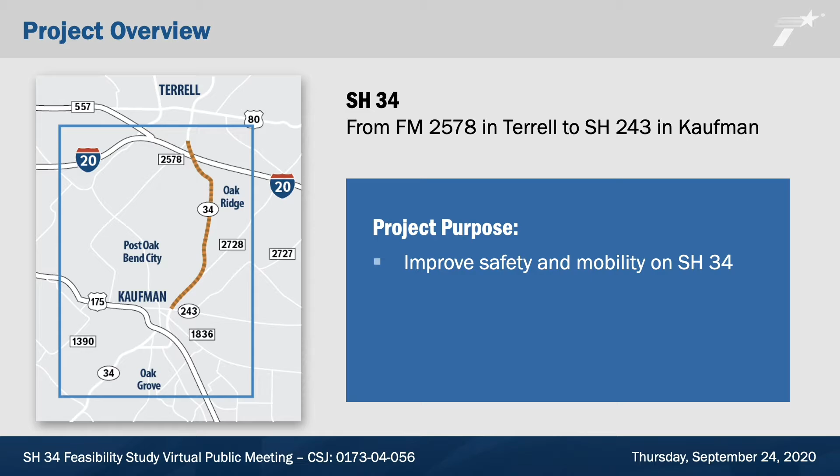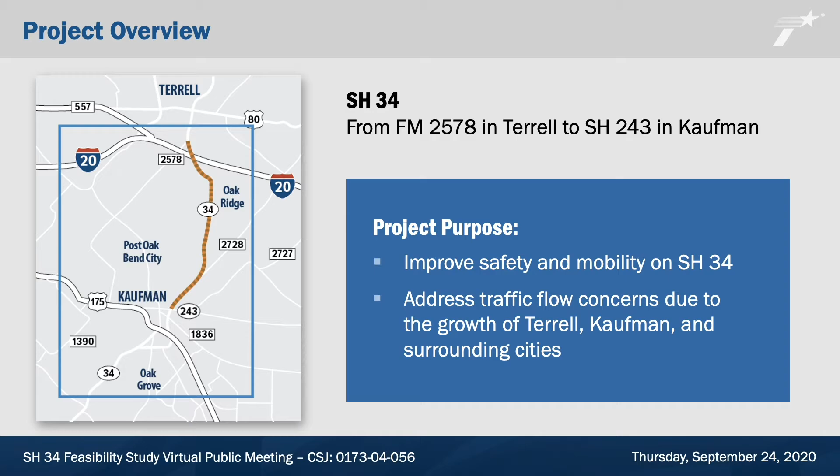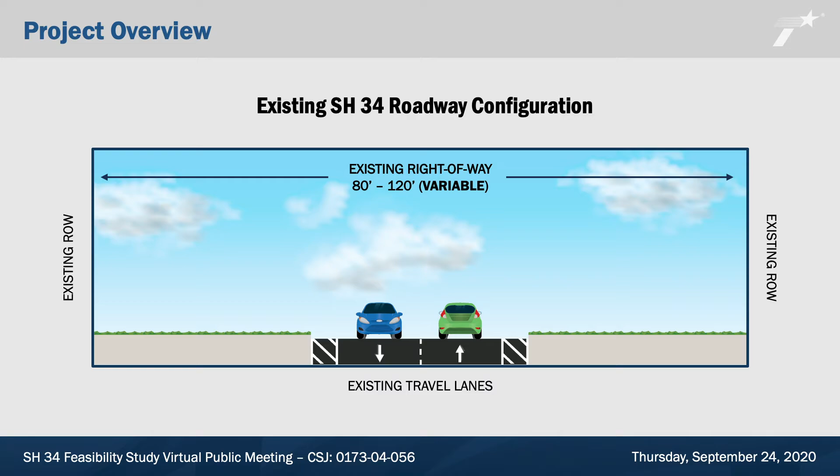This feasibility study also considered safety and mobility, population growth, environmental impacts, costs, and public input when considering potential alignments and improvements. The population in Kaufman County is projected to grow 83% by the year 2040, and SH34 is projected to have about 25,000 vehicles per day, including heavy truck traffic, by 2045. The existing SH34 roadway configuration consists of one travel lane in each direction with shoulders and an existing right-of-way varying along the corridor between 80 and 120 feet.

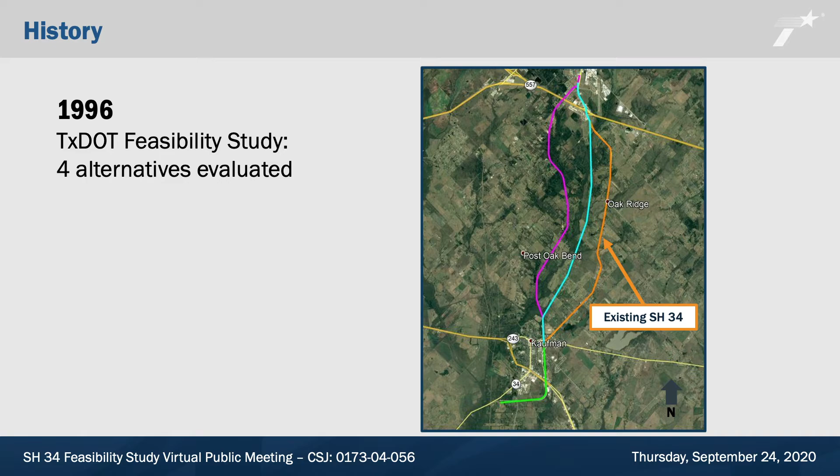There have been previous feasibility studies conducted within this study area. In 1996, a feasibility study was performed by TxDOT and 4 alternatives were evaluated. The recommended alignment was an old railroad corridor and a southern connection around the west side of Kaufman, shown in light blue and green on the map. In 2006, another feasibility study was performed by TxDOT and 11 alignments were identified. The recommended alignment, shown in orange, was ultimately added to the Kaufman County Thoroughfare Plan.

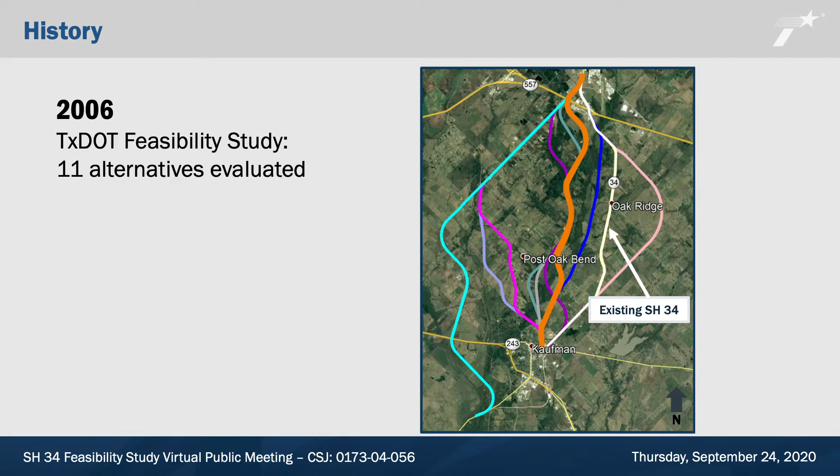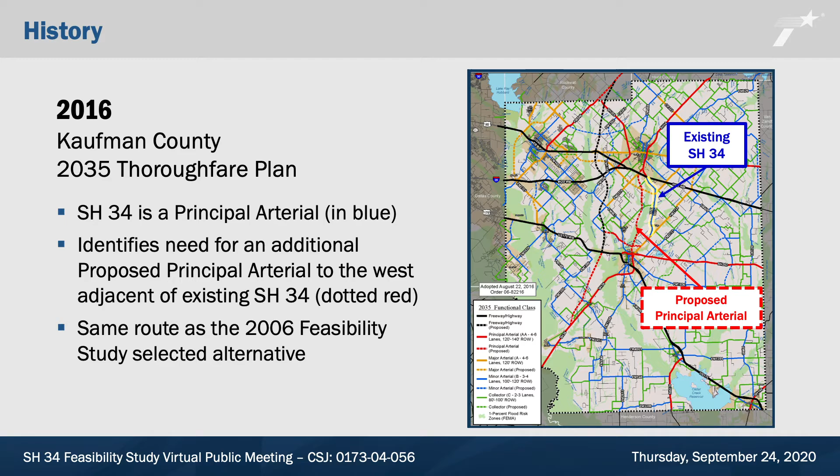The Kaufman County 2035 Thoroughfare Plan identifies existing SH34 as a principal arterial, shown here in blue with yellow highlight. The plan also identifies a proposed principal arterial to the west and adjacent to existing SH34, shown as a dotted red line, which was the 2006 feasibility study's recommended alignment.

This brings us to the current feasibility study, which began in 2018 with 8 alternatives. The assessments began with an evaluation that provided a framework through which alternative alignments could be analyzed. The comparative analysis determined how well the alternative alignments addressed the study purpose and minimized adverse impacts to the human and natural environments of the project area. The 8 alternatives were created with a rural, high-speed roadway configuration to include a design speed of 70 miles per hour, allowing for improved sight distance, and a wide median with a ditch.

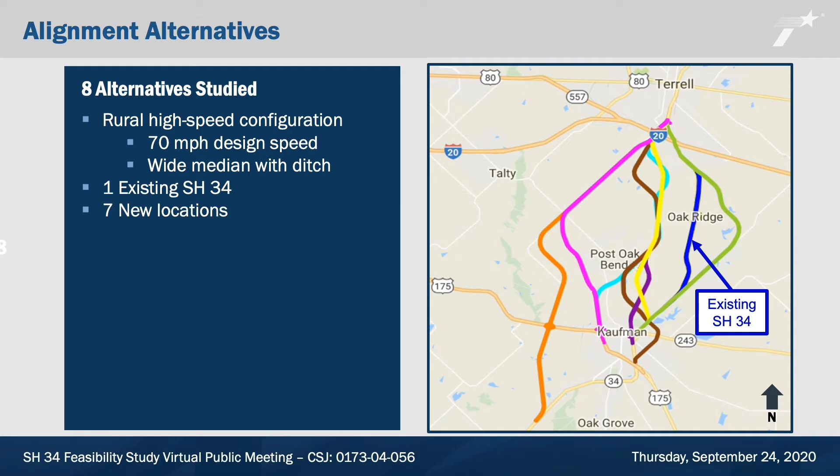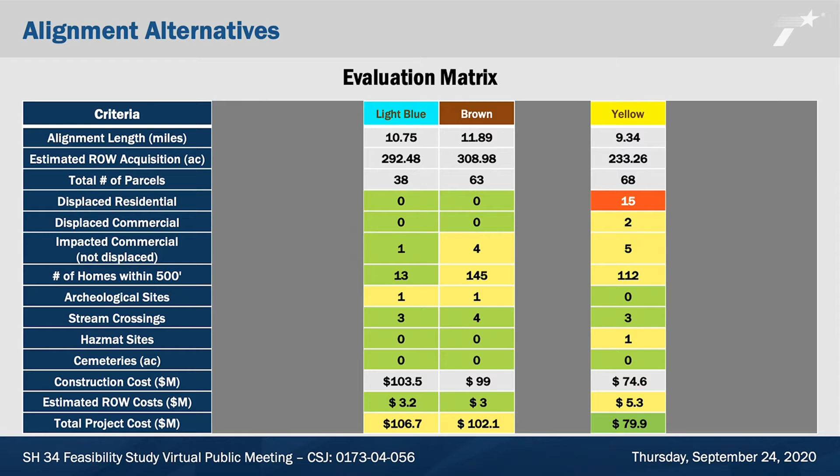Alignments chosen included existing SH-34 and 7 new locations. These routes were presented to local municipalities in spring 2018 and to the public in summer 2018 at a public meeting. Each alignment alternative had various engineering and environmental effects, as shown in the evaluation matrix. The 8 alternative alignments and this matrix were presented. Based on technical analysis and public input, 3 of the alternatives were selected to move forward for further evaluation and study: light blue, brown, and yellow.

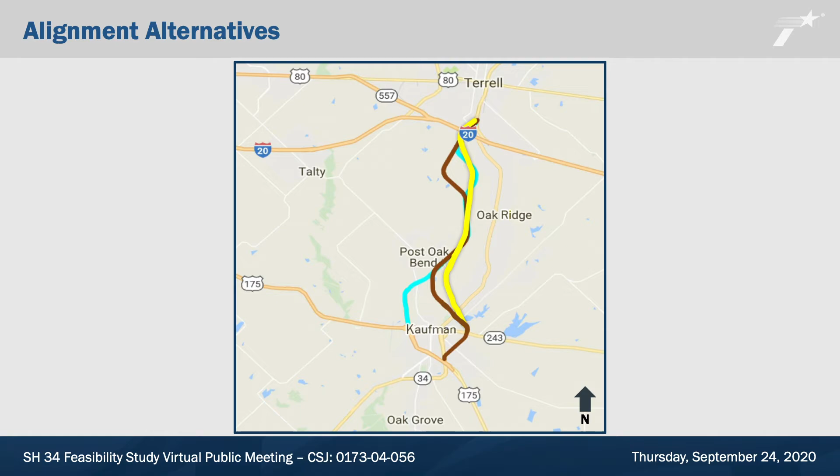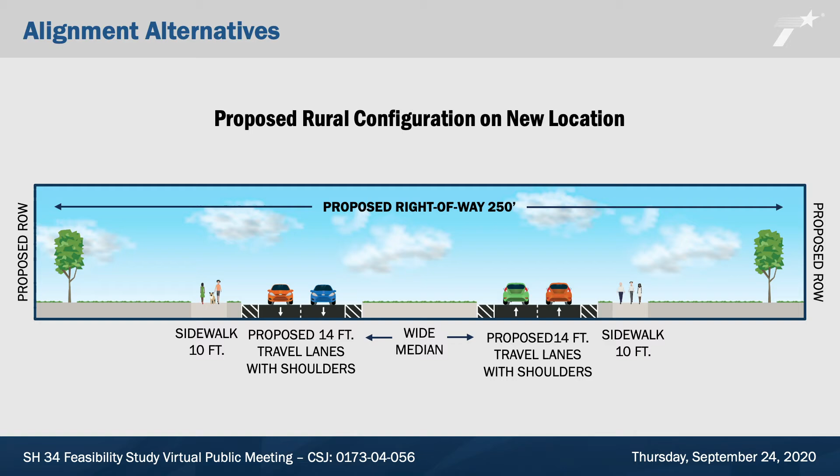All options would be built in new locations that tie into existing SH-34 in Terrell and Kaufman. The 3 selected alternatives had a 4-lane rural highway configuration. It includes 2 lanes in each direction, shoulders, and a 76-foot wide median, and a right-of-way width of 250 feet. The design speed is 70 miles per hour. TxDOT soon recognized that improving existing SH-34 needed to remain on the table. This led to a reevaluation of the proposed design plans for existing SH-34.

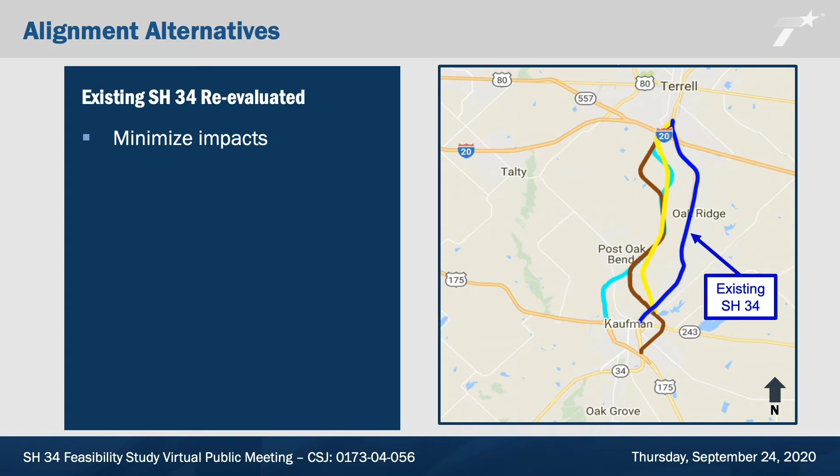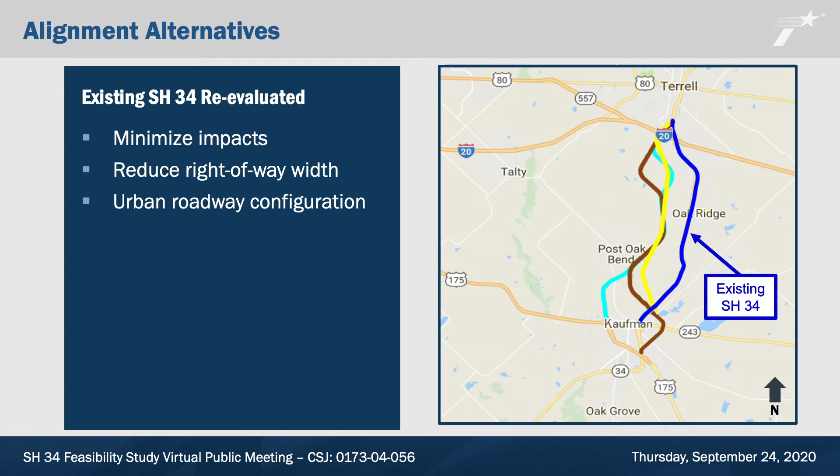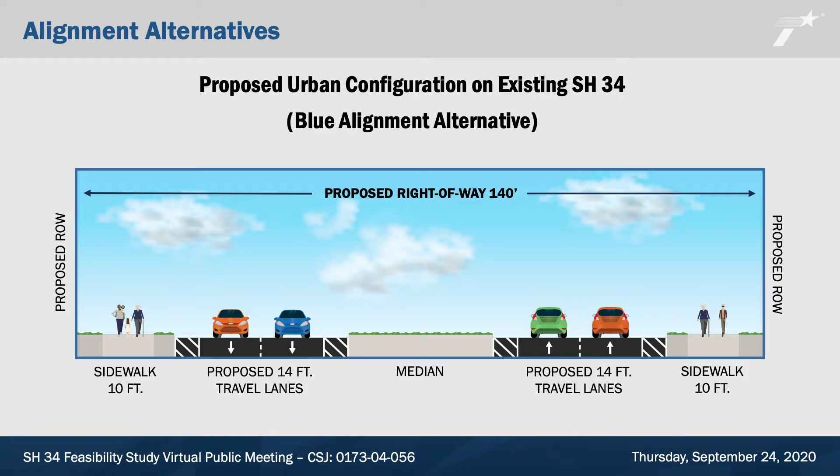Considering the impacts that the proposed 250-foot right-of-way width would have on the human and natural environments, the team decided to move forward with adjusting the roadway configuration from a high-speed rural configuration to an urban one. This proposed configuration has a right-of-way width of 140 feet, 2 travel lanes in each direction, curb and gutter, and a median with space to expand to 6 lanes in the future, and a design speed of 45 miles per hour. These 4 alternatives moved forward for further evaluation.

Each alignment alternative carried forward has various engineering and environmental effects as shown in the table. This table illustrates the number of potential impacts to properties for each of the selected alternatives. One of the major constraints identified was the amount of new right-of-way acreage to be acquired for each of the alternatives. The dark blue option requires an additional 76 acres of right-of-way to be acquired the length of the roadway, while the light blue, yellow, and brown options require over 200 acres on new location alignments. The right-of-way needed along existing SH-34 is much less compared to the other alternatives.

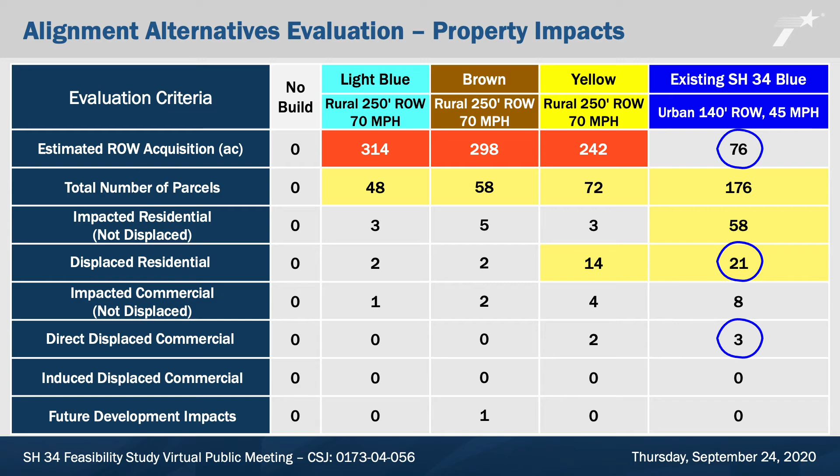However, the blue alternative alignment also requires the most displacements of the 4 alternatives, approximately 21 residential and 3 commercial. In addition, the southern segments of the dark blue and yellow alternatives would displace the most residential properties as they approach Kaufman. Environmental impacts for each of the alternatives included potential impacts to the 100-year floodplain, park properties, and hazmat sites. Socioeconomic impacts were also considered.

All 4 alternative alignments would satisfy future travel demand for the year 2045 and would reduce the risk of crashes. The 4 alternative alignments would also enhance mobility and safety and support the future regional economic growth of Kaufman County. The estimated total project cost for each alternative, including the no-build option, is shown here and broken down by category. The yellow alternative has the lowest total cost, followed by the blue alternative.

If a new location was chosen to move forward as the recommended alignment, existing SH-34 would remain in service. Therefore, the maintenance cost for the no-build, light blue, brown, and yellow alternatives all include the maintenance cost for existing SH-34. This includes regular overlays and other routine maintenance costs, such as mowing and guardrail and pothole repair. The maintenance cost for the blue, urban reconstruction of existing SH-34, is the lowest of the 4. This is because the pavement life of a newly reconstructed roadway is anticipated to be 20 years. This requires less time, money, and material than is required to maintain existing SH-34.

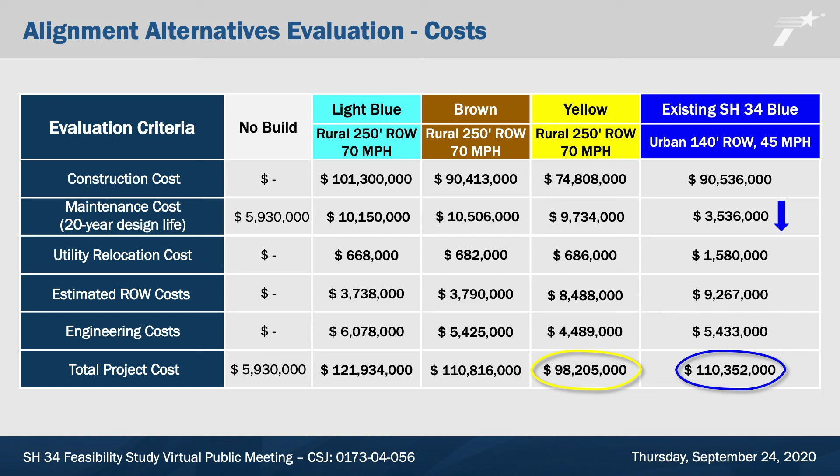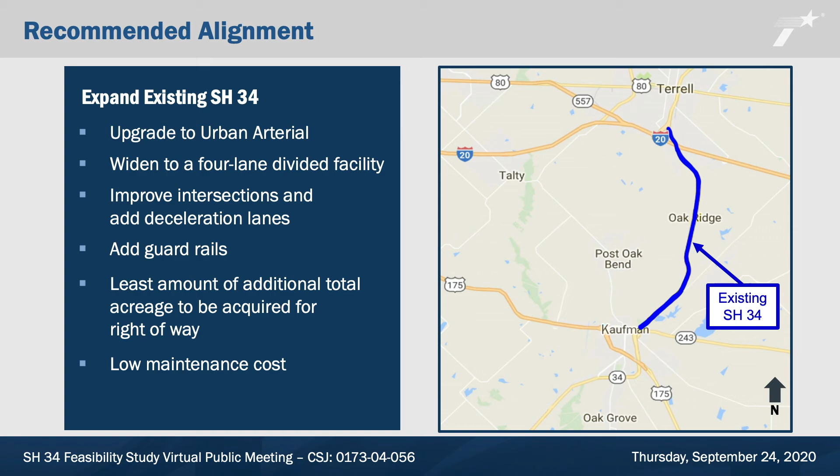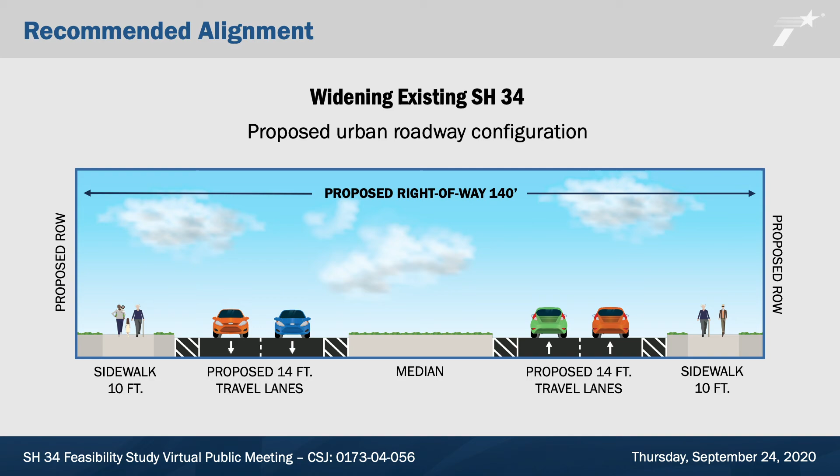Based on technical analysis and feedback from community leaders and the public, the recommended alignment is to reconstruct and widen existing SH-34 from FM 2578 in Terrell to SH-243 in Kaufman. The roadway configuration would be similar to the Kaufman bypass and accommodate 4 travel lanes and include sidewalks. The urban roadway configuration would have a design speed of 45 miles per hour and is proposed to shift side to side along the existing alignment to minimize impacts and to improve existing horizontal curvature of the roadway. It also accommodates an increase in local and heavy truck traffic and provides enough room for a future expansion to 6 lanes. The recommended alignment and typical section will be used in the next stage of project development.

Next steps include roadway schematic design and environmental clearance, followed by right-of-way acquisition, construction plan design, and utility coordination and relocations, and finally, construction. Please note the listed timeframes would begin once the feasibility study ends and are subject to change.

While comments are always welcome, they must be received on or before Friday, October 9, 2020 to be included in the meeting report. Responses to your comments will be included in the public meeting documentation and given full consideration while preparing the final recommendations. You can submit comments through the following 4 methods. Mail in your comments to the TxDOT Dallas District, Attention Stephen Endress, PE, 4777 East Highway 80, Mesquite, Texas, 75150. You can email your comments to stephen.endress@txdot.gov. That is stephen.endress@txdot.gov. You can also give a verbal comment by calling 469-595-7063 and leaving a message. Or you can comment online by visiting